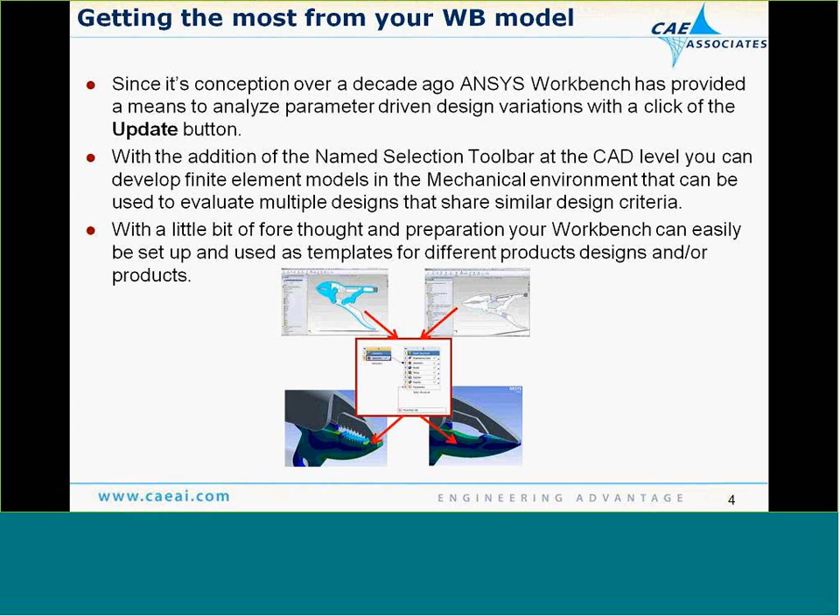So now we've gone beyond the ability to simply put in parameters. We've added the ability to also make the geometry uniform and parametric. The key to accomplishing this is to have a little bit of planning up front and develop a consistent, recognizable set of names for both your parameters and your name selections, and we'll also talk about utilizing your coordinate systems. That's another aspect of the model that can be shared between various CAD models.

As an example, step one: let's go in and take a look at the geometric parameters. This is something we've had the ability to do since the beginning of Workbench, so it's our first place to start. I'm just giving a couple of basic examples. I'm going to analyze a flanged pipe connection with some bolts in it, and then substitute in something shaped completely differently but essentially the same idea.

So I have some basic parameters that I can share between these two different geometries, things like the length of my pipe, the wall thickness of the pipe. These are all parametric - they don't have to be the same actual value. We're simply going to substitute them in and use the parameter values for the particular design we're dealing with at that time.

Just a couple of examples here. It's always a good idea to develop not just a nomenclature you can be consistent with across different members of that family of designs, but also parameter names that make sense to you, because in the Workbench environment there's no way for you to click on that parameter name and see it highlighted like you can on the CAD side.

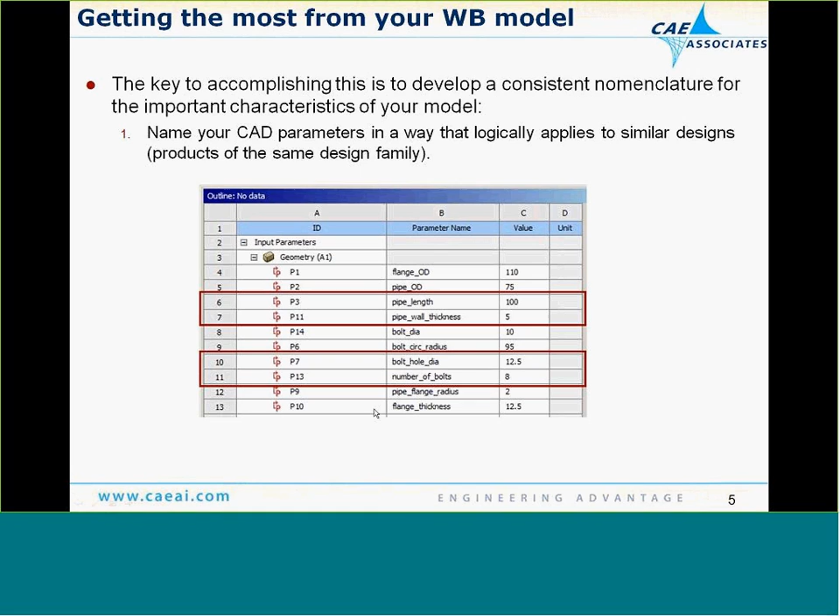The more recognizable you make these parameters, the less time you have to spend going back to the original CAD model to figure out what the parameter was. The parameter names shown in column B are the ones we're defining. The ones in column A are the ones ANSYS is assigning to the name we've provided.

We also want to develop consistent nomenclature for things like coordinate systems. Very often we're using coordinate systems for directional loading. We're going to talk a little about construction geometry and directional result items. Coordinate systems are very useful if you have a datum plane in your CAD model that's spaced, located, and oriented the way you're going to utilize on the mechanical side. By all means, bring it right into the mechanical environment.

You can bring it in through Design Modeler. Any information that's brought in - name selections, parameter names, and coordinate systems - can come through Design Modeler and still be passed into the mechanical environment. So there's no restriction as far as whether you go directly from CAD to mechanical or include Design Modeler in the loop.

In this case, I have an example where I'm going to do a force summation at a particular location. I'm going to define some construction geometry and use that to do, for you mechanical APDL users out there, essentially an F-sum in Workbench. Keeping that plane sort of uniform, I can use it again in my subsequent geometry.

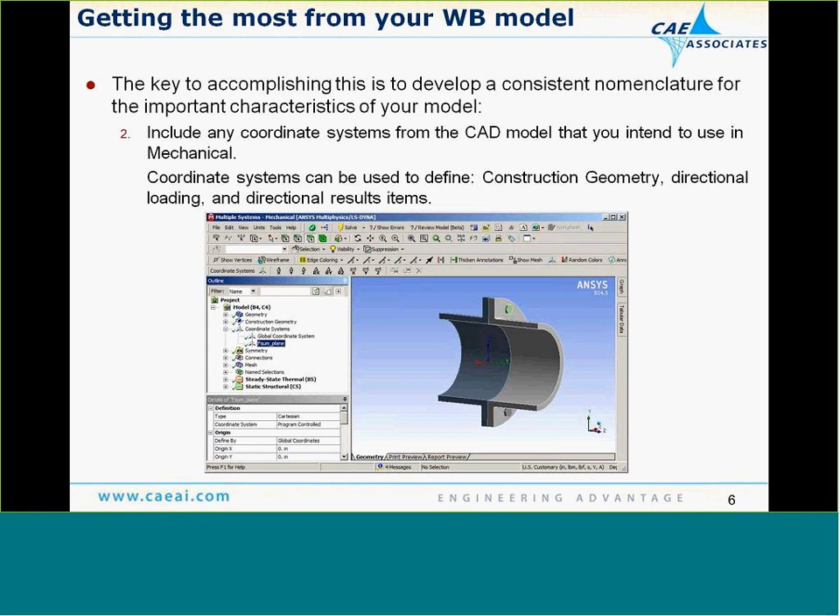So now we get to the real crux of how to do this effectively. We've already known about parameters for a while. Coordinate systems are useful to some degree, but we can essentially get away without them in most cases. But the key to making this particular method usable and continuous and persistent is to use the name selections.

Name selections are groups of geometry that we can define at the CAD level, at the Design Modeler level, and then subsequently also at the mechanical level. So we can start out - I'll give you a simple example - with some geometry at the CAD level, and bring that into Design Modeler.

We may add some geometry to that. We could create another name selection of the new geometry, create an assembly of the old and the new together as a name selection, or do that at the mechanical level. You basically have full transparency for these name selections from CAD all the way down to mechanical.

Hopefully most people have had a chance to use this. The CAD Name Selection Manager is built right into the API. I'm showing you an example here of SolidWorks. You'd simply pull down the ANSYS 14.5 menu, and you'll see the ANSYS Name Selection Manager pops up this little window in your CAD interface. You select Geometry, select Create, and it'll prompt you for a name for that particular section of geometry you'd like to save.

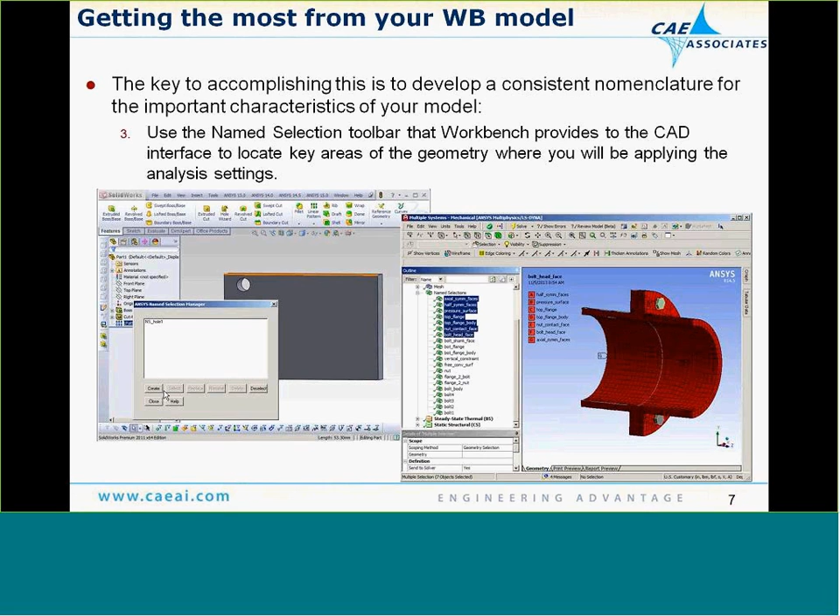We'd like to do this as much as possible, because the more you do up at the CAD level, the more you're going to be able to utilize these name selections throughout the process flow as you work your way down through Design Modeler and then into mechanical.

So what can we do with these name selections? Well, there's very little we can't do at this point with name selections - they're all over the mechanical interface. We're going to show this example where we've defined the entire model via name selection definition. I'm not picking a single piece of geometry at the mechanical level.

So we can define things like symmetry regions if we're using the symmetry folder, contact or joint connections. It's almost easier in some cases to utilize name selections than to do the automatic contact generation, because when you use name selections, you know exactly what you're picking. For instance, in the case of contact, the target and the contact face - you simply switch from geometry selection to name selection, and pick them from the list.

As long as you get them into mechanical, they're all there and usable. These names are now keyed into this particular mechanical model. So if we want to bring in a similar geometry that has those same name selection names, all of these settings are going to be mapped onto the ones we've chosen.

Continuing with our name selection options, we can define mesh controls - anywhere you'd be picking geometry, you can substitute in a name selection. So loads and supports, imported loads - for instance, if you were doing a sequential thermal structural analysis and dragging and dropping the solution from thermal onto structural, or using the external data utility, you can map that onto locations defined via name selection. And lastly, and most importantly, we're going to be scoping our result items to particular areas of geometry. Once again, why pick geometry when you can use name selections if they're there in the model for you?

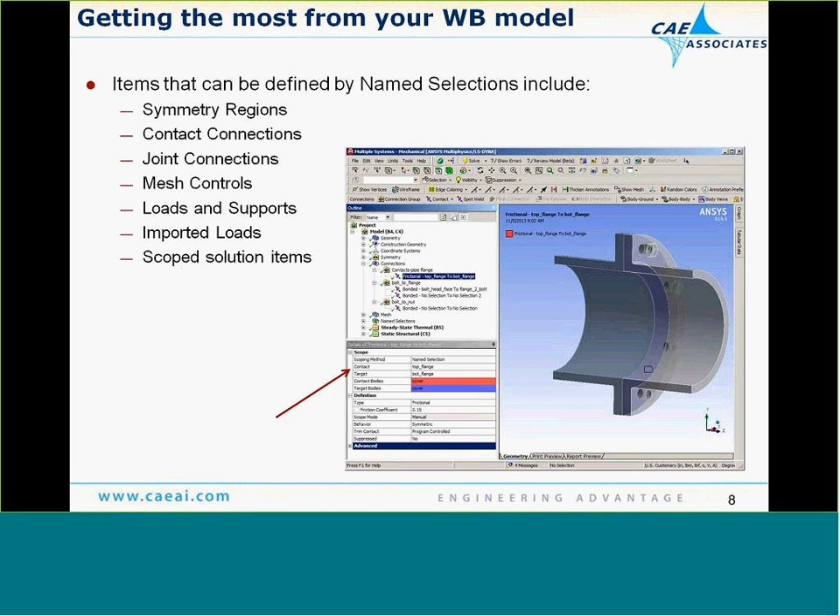So basically what we're trying to emphasize here is that you can set up and run an analysis system, and it can be a complicated schematic of various different types of analyses, like a structural steady-state thermal, supplying temperatures to a static structural, which then would supply pre-stress to a modal, and so on.

Once you've got that analysis schematic set up, if you're defining all this with name selections, you could simply substitute in a new geometry. On the geometry row, you right-click and there's an option to replace geometry. Put in the new geometry, provided you've used the same nomenclature for those name selections, and everything automatically gets remapped onto the new geometry.

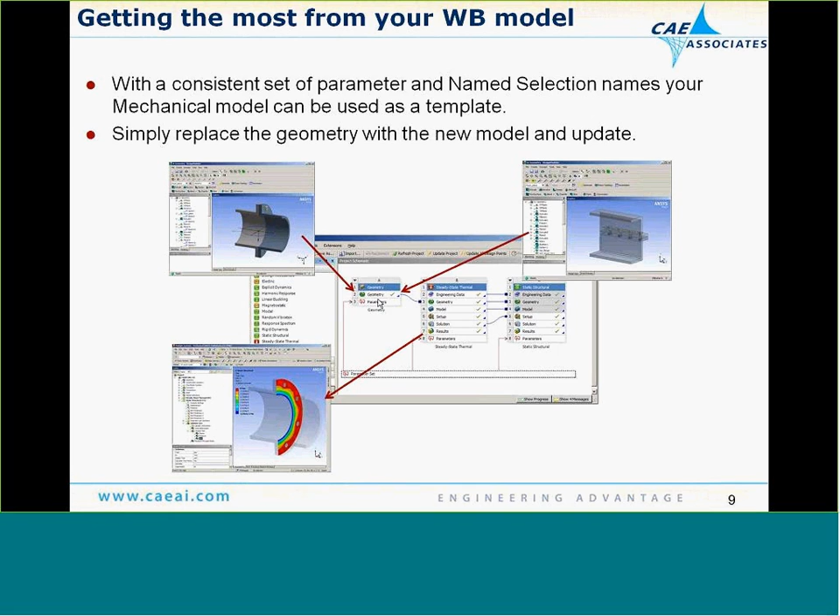So let's take a look, let's show an example of that here. I'm going to start out at the design modeler level here, and this is that flange pipe that I was talking about. This could have, as I mentioned, started at the CAD level, it could have come down through design modeler, and I could have done additional defeaturing operations here. It doesn't matter whether I start at CAD or design modeler. In this case, I'm starting at the design modeler level, but you get the idea.

And you'll notice as you go through my design modeler history that I've done a series of things with the intent of being able to reuse this model. So I'm thinking of areas up front that I'm going to want access to when applying mesh controls, boundary conditions, or result scoping. For instance...

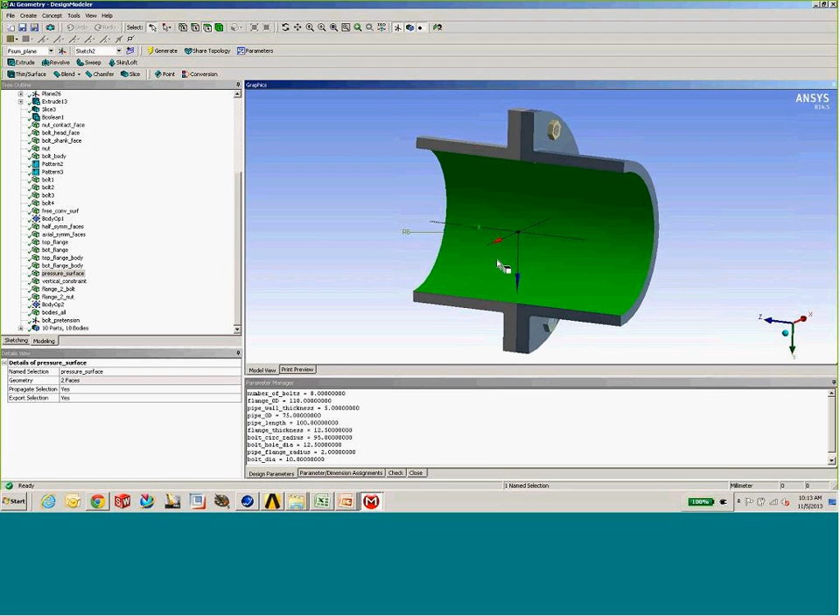Some of the contact regions here - I have something called the nut contact face, that's the underside of the nut. Let's scroll down - free convection surface, this is an area where I'm going to apply a free convection coefficient for my thermal analysis. I also have the internal surface defined as the pressure surface. So I'm basically thinking up front about how I'm going to analyze this part at the geometry level, so that I can reutilize this model to its full extent. So we'll do things like that.

We'll also bring over some coordinate systems, like this is my bolt pretension direction for the coordinate system. The key to bringing coordinate systems over is to simply come down to the bottom of the details menu and change the export from its default no to yes. On the design modeler side, any coordinate system by default will not be exported to mechanical, because they don't want to flood your mechanical environment with all these systems. So you're going to pick and choose specifically the coordinate systems that you'd like to bring across.

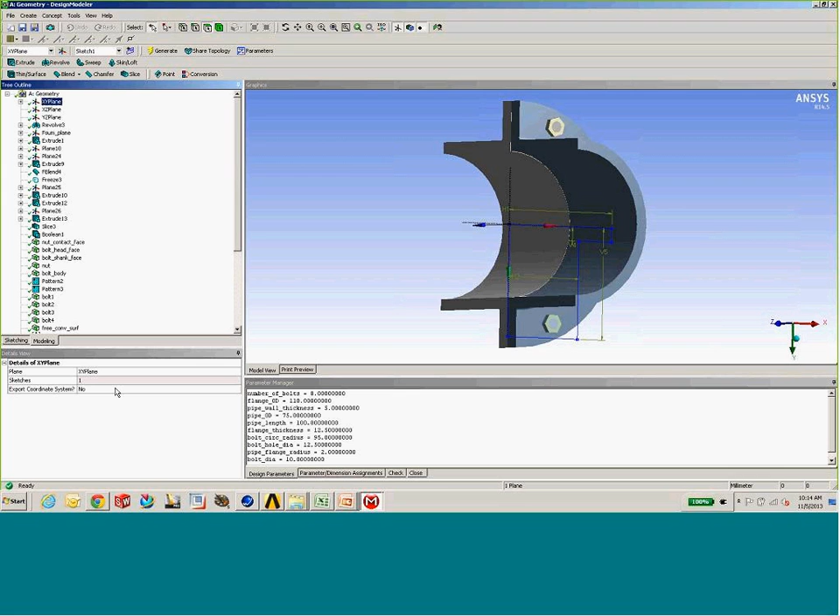If you are bringing coordinate systems in from the CAD tool, in the details of the attach function, you'll see the name selections that were imported from CAD, as well as any of the coordinate systems that have come across.

And additionally, we're always looking to find ways to study the sensitivity of a particular design, or now a family of designs, using our parameters. So I've got my parameters shown here down on the bottom.

So my system, let's bring that over now here, is simply going to be - I've got a geometry item where I've developed the geometry or imported from CAD. I drag and drop that into a steady state thermal analysis. In this case, I happen to be using the same mesh between the two models, but that's not even required, because again, we're essentially mesh independent when we start using these name selections for the boundary conditions. I'm using the thermal result as a structural load, so I drag and drop the solution of the thermal analysis onto the setup. So I've got essentially a basic schematic here in mind.

Now, some of you may have seen, down under custom systems, the ability to develop your own system here when you've developed this analysis schematic. And that's all true - if I wanted to save this as a custom system, I could just right-click out in the open and tell it to add to the custom menu.

But I want to caution you about this, because these operations that we're performing at the project level are not aware of anything that happened inside the mechanical interface, because the mechanical environment is still what's called a data integrated interface.

It's not built in or written in the Python format that the project menu is written in. So until we get to a point where Design Modeler and Mechanical are all inside this same project window, we're not going to be able to fully utilize this custom system capability.

For the time being, what we're going to do is set up the model and then make a copy of that model. Just simply save as from the project page, substitute in our new geometry. So let's take a look at our mechanical model and see how we set this up.

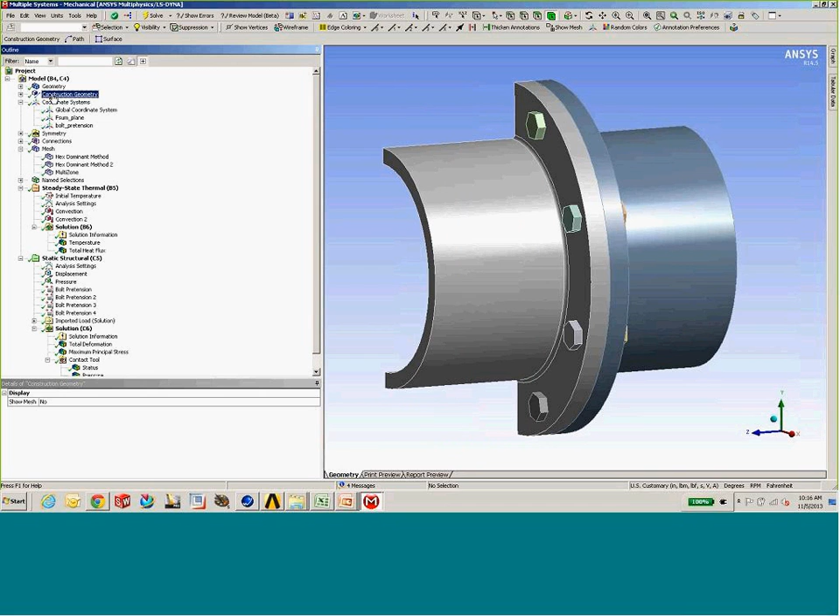We'll bring over Mechanical. Going right from the top, I mentioned construction geometry. I have a surface that I defined that I call my F-sum surface. I'm going to take the sum of the forces in between the bolts on one side of the flange. In order to set up a surface to map results onto, I need a coordinate system.

I can use any of the global coordinate systems that come in, or I could define my own local coordinate system at the Mechanical level. But for consistency, I want to use a coordinate system that was developed and common between my various designs at the CAD level. So I've done that here. I've imported a coordinate system called F-sum plane, and I've made my construction surface defined at that particular coordinate system, F-sum plane.

Symmetry. When we bring in our symmetry tools, if you've defined symmetry in the geometry model in Design Modeler, that will automatically result in a symmetry region on your Mechanical model. In this case, I did not do that.

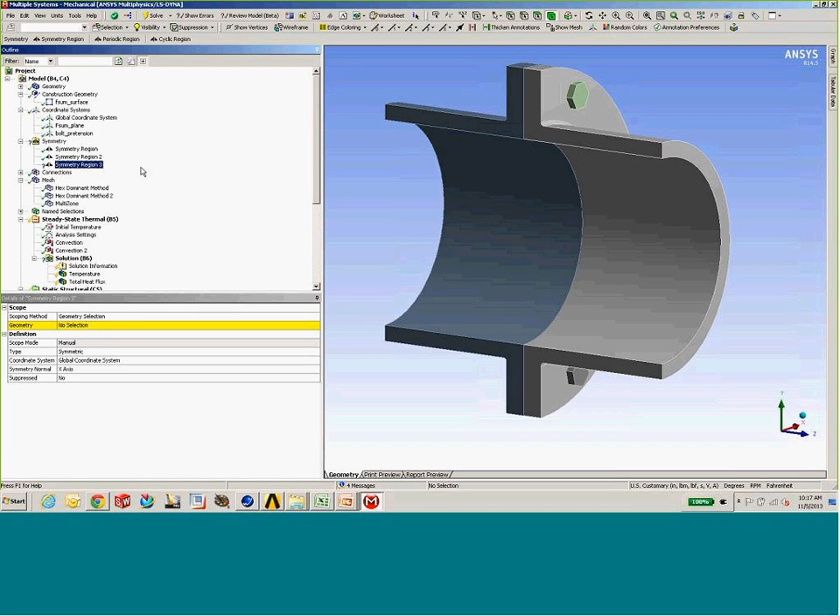I wanted to define them manually, so I simply right-click, insert a symmetry region, and switch from geometry selection to name selection, and then you'll have access to all of the name selections that you've brought into the Mechanical model. If you're having trouble finding them on this menu and want to make sure something is there or not, anytime you've brought in name selections, they will be added to the outline tree, so you'll have your full list of name selections shown there. It's a quick and easy way to double check.

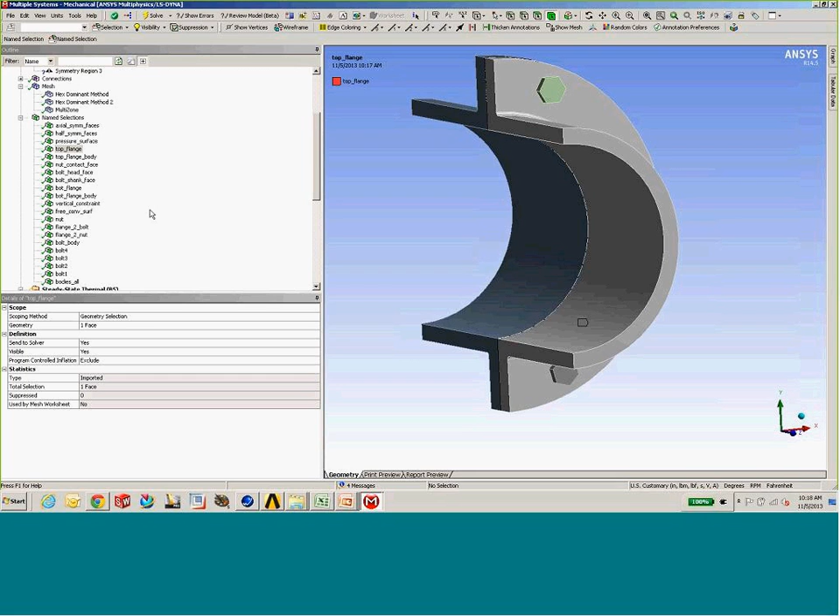Let's say you had made a mistake in the number of surfaces you selected on your name selection. You can always go back here and edit it locally in Mechanical, even though it was developed up at the CAD level. I don't recommend that you do that—I think it's more consistent if you start up at the CAD level whenever possible. But these are not hard-coded in any way simply because they were imported. They're imported, but you have the ability to edit them at will.

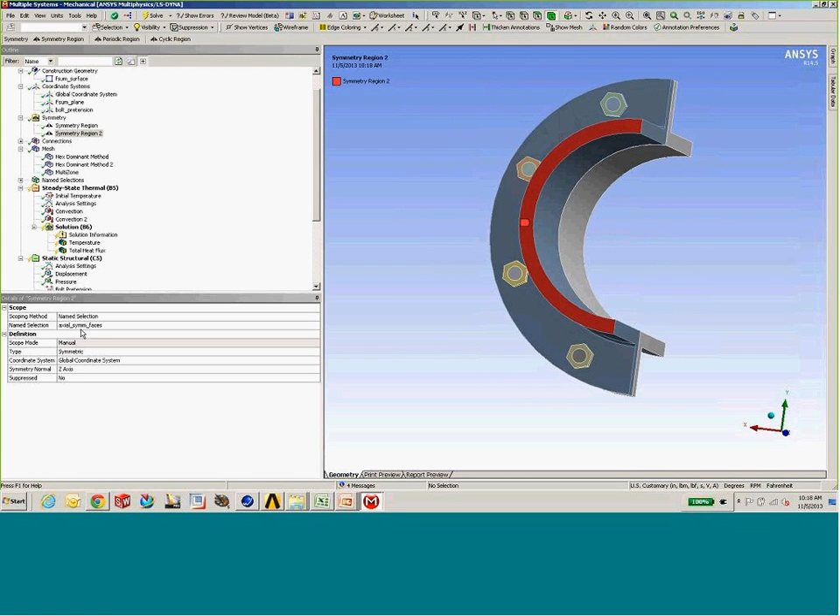So back up at the top here, we define a symmetry region and pull down from the list. I don't want to add one in here because I don't need it at this point, since I've got one at that face. I've got another one which I called my axial symm face. Again, these are all imported from the CAD tool.

So let's go down to the next step here and look at our CAD connections. I have found that the ability to create these connection groups and locally define discrete regions of connection between the model via name selections is far more convenient and far more intuitive than using the automatic contact tool.

You can use the automatic contact tool, it'll generate a whole bunch of regions, but it's still up to you to go back, find these regions, edit them, and make sure they are what you want. If I've already defined the surfaces, I like to create various folders so I can categorize and keep track of where my contact regions are. As I go from model to model, it's much easier for me to check, because I've put thought into the way I'm connecting these parts together, and I know exactly where to look to make sure these contacts are being updated correctly.

So I've got a connection region that I call pipe flange. That's my frictional contact, or nonlinear contact, between the two flanges. If you look down on the bottom here, I've scoped it to name selection, and I have defined my contact and target faces as top flange, bottom flange. These are name selections that, again, came in from the CAD system.

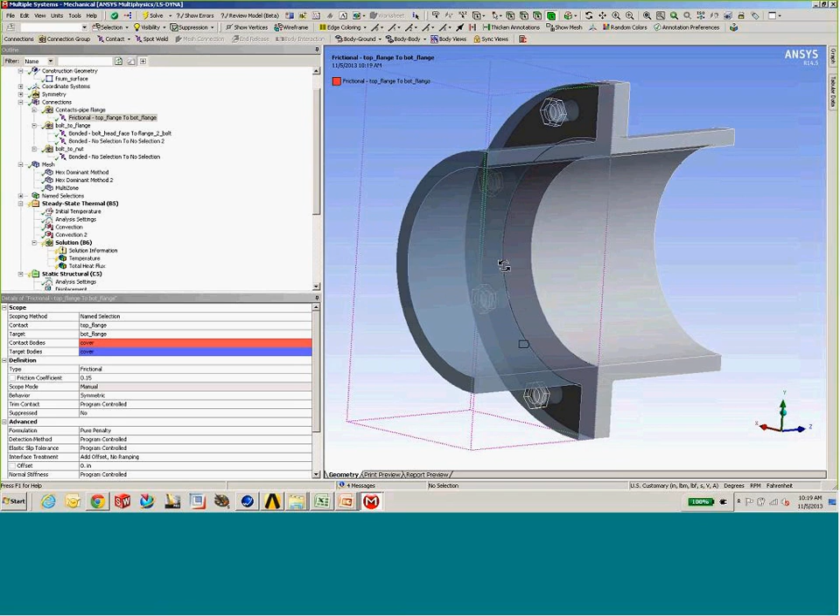I also did that with my bolts—the bolt to the top of the flange, and then the nut to the underside of the flange. I have bonded contact there.

And then I've got a bonded contact between each one of the bolts and the nuts, assuming that I have sufficient friction there to treat that as bonded.

So again, I have become a big fan of using these contact folders. You can still create the automatic contact and then drag it into the folders that you want to organize things.

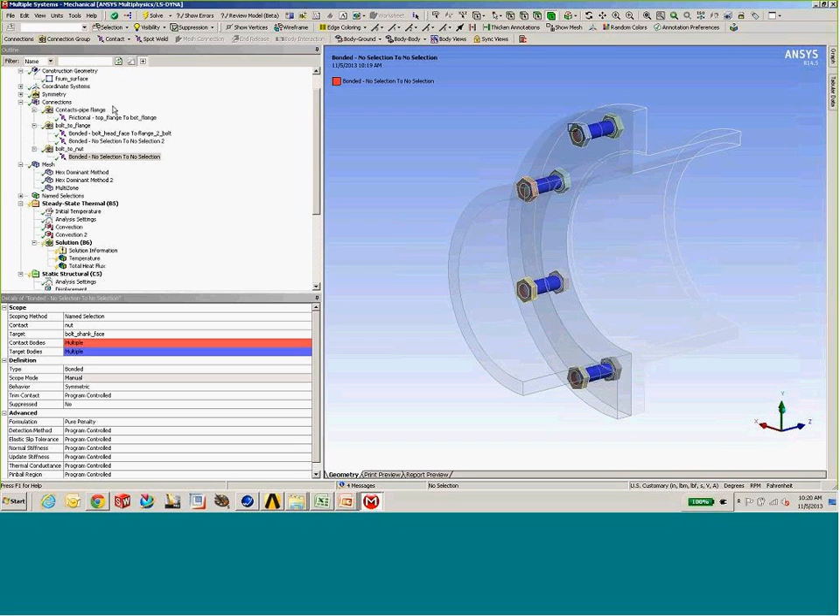Once you've done this, very key aspect here, once you've got your contact regions defined and narrowed down to what you want them to be, go up to the connections region and turn off the automatic contact connection. The automatic contact connection is going to be on by default. So you can go through all this effort, you can get your contacts where you want them to be, but if you go and substitute in new geometry and it refreshes, it's going to go and create a whole series of other contact regions.

That you may have either deleted or edited. It won't change the ones that you've defined, but it'll add in a bunch of additional ones, which you'll then need to clean out. So basic rule of thumb here: bring your model in the first time, define all of your contact regions, and once you've got them in the order you want and all set up, turn off the automatic contact generation for subsequent refreshes of the geometry. It's just going to save you a lot of time and effort.

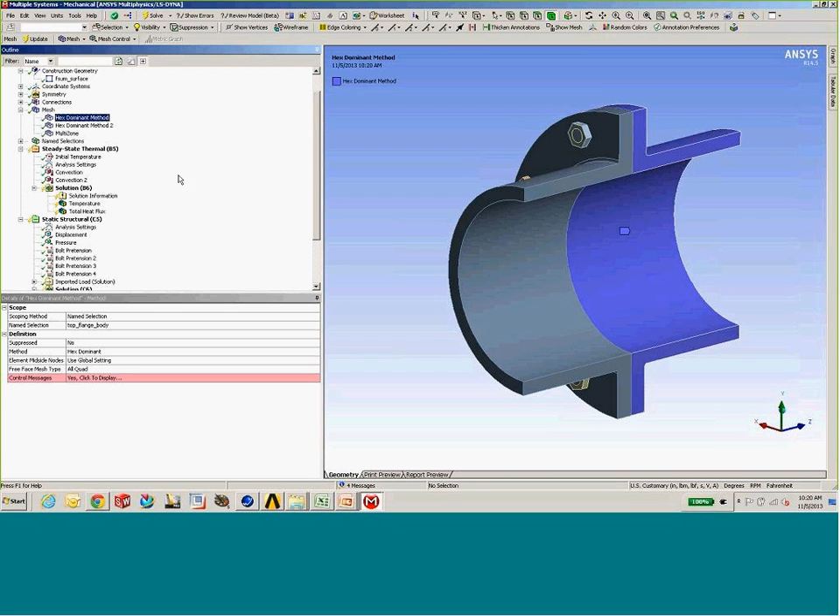So just continuing on, we have some mesh controls, again defined by name selection for my hex dominant, for my multi-zone meshes. My convections, once again, defined by name selection. There's my pressure surface, there's my convection surface. My heat flux, in this case, is scoped to a particular body in the model via name selection. Again, I think you're getting the basic idea now.

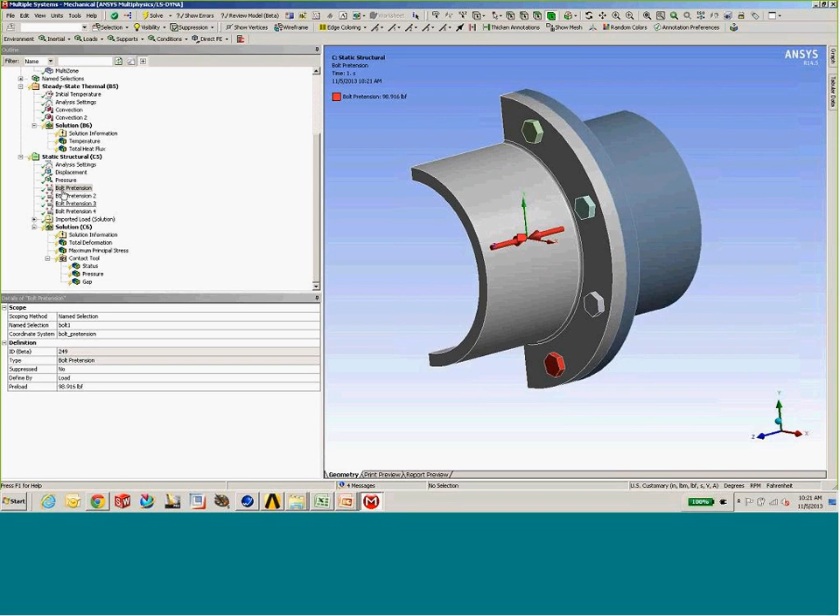Same thing with my bolt pretensions, my internal pressure on the structural side. I have a displacement—I had to put in a single displacement point to take care of the last degree of freedom that was open, the vertical direction. And again, I put in a name selection called vertical constraint at the CAD level, was able to grab it here. So that's basically the idea.

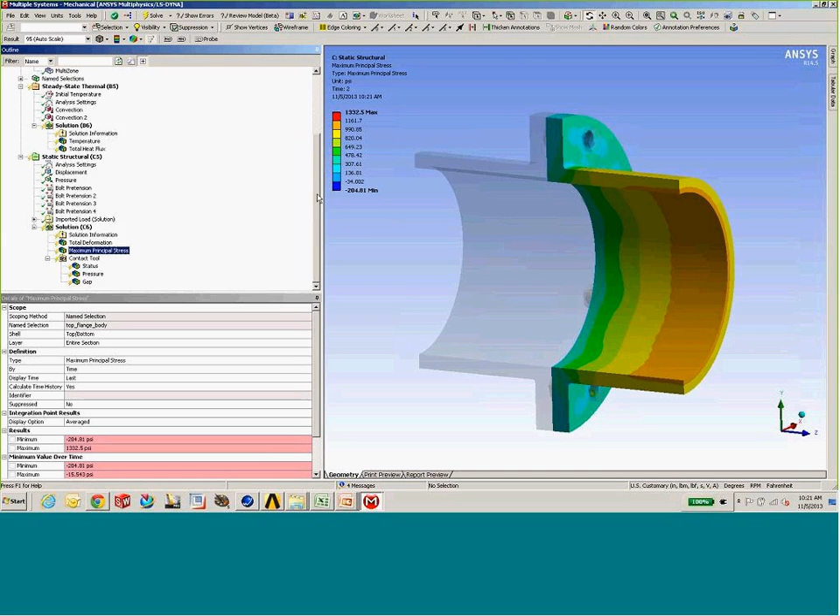We're setting this whole thing up, right down to the scoping of the results, from the very top of the model. Now, what can we do with this now? If we've done this consistently, how can we now reutilize this model?

Let's go back to our project page here, and typically you'll save a copy of this. You could right-click and duplicate the model and substitute the geometry there. But let's just show you very simply how we can substitute in different geometry right into this. So assuming that I save as, I now have iteration 1, this will be iteration 2.

I simply come up to the geometry, and I right-click—oops, that's not what I wanted to do there. Looks like I froze up. Let's do it a different way here. Bring the geometry into this point. I'm going to bring in a different geometry called the rectangular pipe, and I just sever the link here.

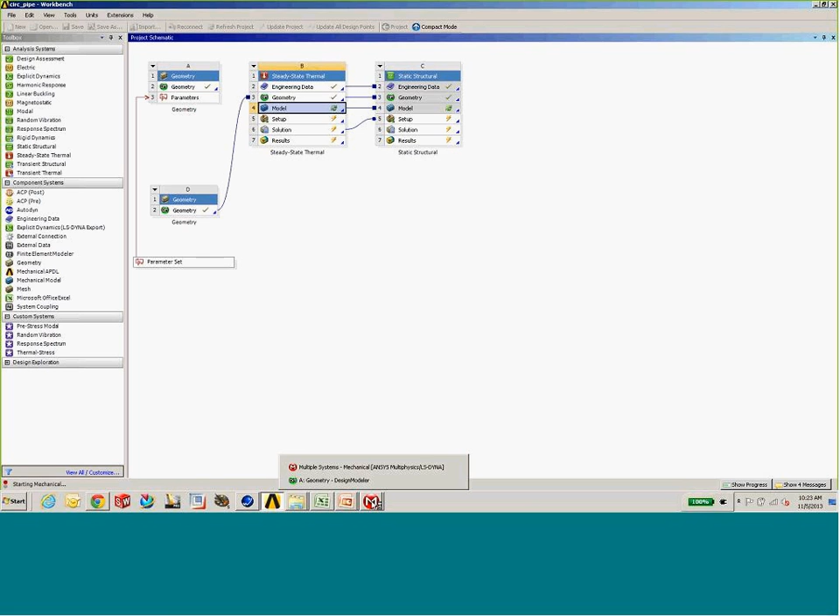Right-click and reconnect it. And I want to make sure that my properties are all set up the same way, so I should have all of my parameter prefix and everything set up as I intended. And if I did everything right here, when I refresh this model, bring our model up here, and it goes through—it should be rereading the geometry.

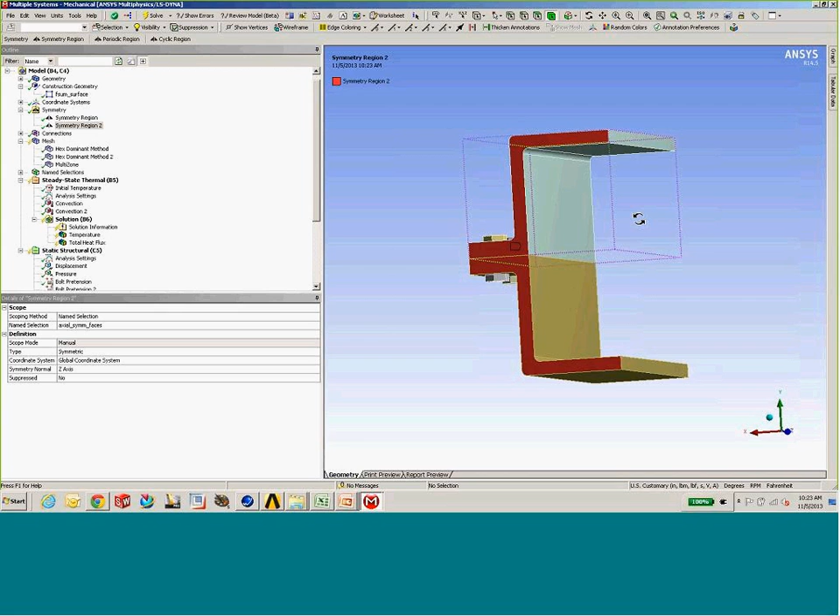You can see it's now bringing in this square flange. And once again, the square flange had that consistent set of nomenclature defined for the symmetry regions. Half symmetry face is there, the axial symmetry face is there. The mesh control on the various parts, again, because they're all toggling to the names of the bodies that we've selected, they're now persistent, and they've been added.

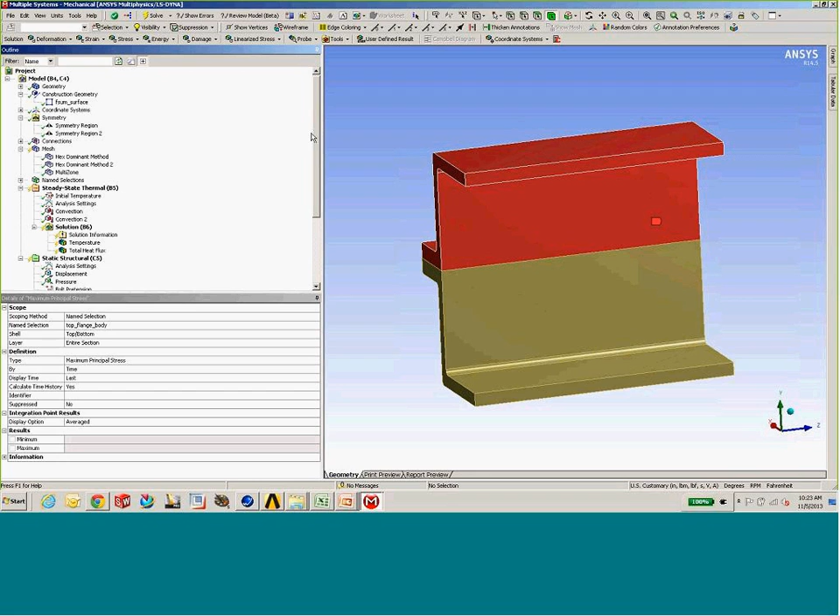There's my internal convection, my external convection, right all the way down to the scoping of the contact region to a particular body. So that's really all there is to it. It does require, as I mentioned, some forethought and some planning at the beginning of the process. But when you do that, again, you can get the maximum usage out of that model. You set it up one time, and you can use it for multiple designs.

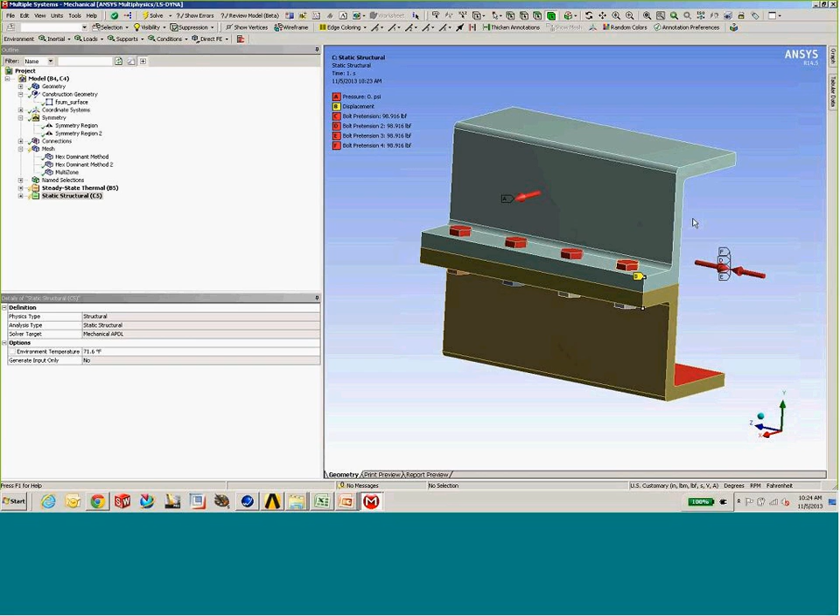In addition to that, the parameters are also persistent. So when we open up the parameter set, we'll still have the ability to populate a design table or use Design Explorer with that same model, because everything else works exactly the same as it did with a single model. You've now just simply substituted in, or snuck in under the door, a different geometry file that's using the same nomenclature from the standpoint of the parameters and the name selections.